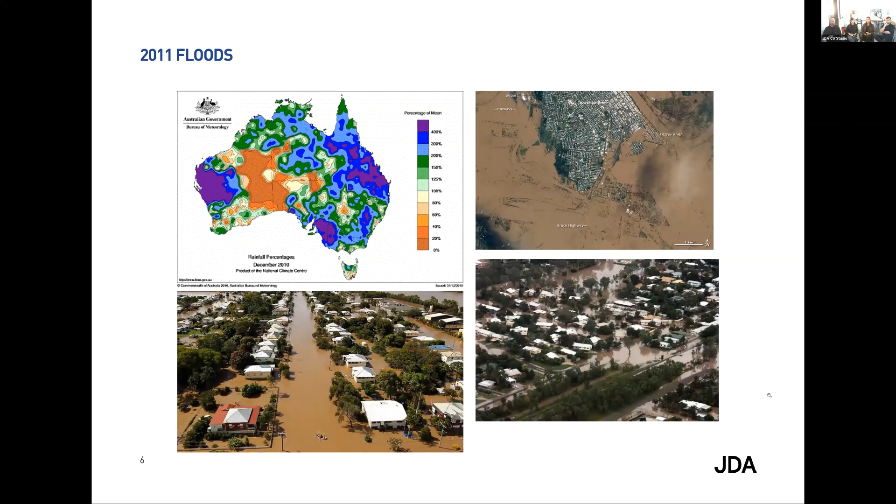So this is my hometown of Rockhampton. One of the interesting things about Rockhampton is, given that it actually floods regularly, everyone there literally grew up in a town where flooding is not seen as a disaster - it's actually well and truly understood. Our houses are all generally raised up above the flood line, even though that line is now moving higher with the effects of climate change. That's generally what happens in a flooding event, so it's not seen as a disaster. Whereas this is Brisbane, where over time population growth and development has meant people are built in underneath and in the floodplain. So it's something that is a problem we work with on a daily basis.

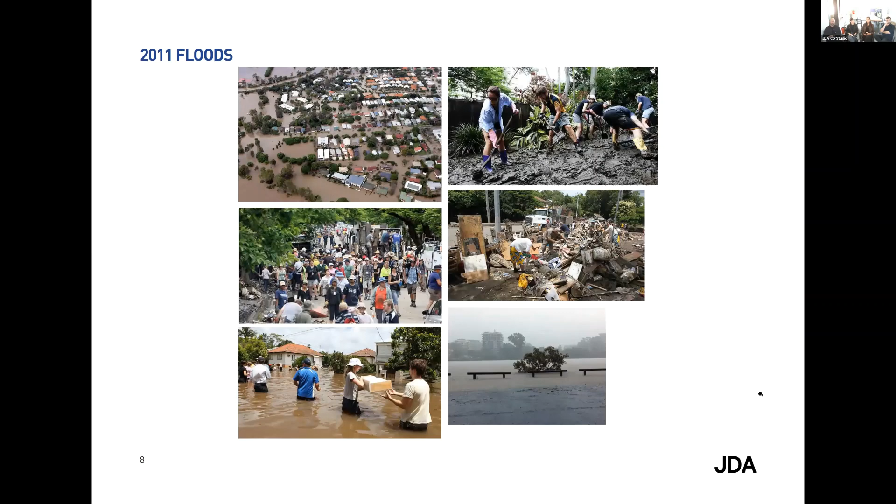This will be in the briefing document we send around. It just gives you an idea - interestingly, we are moving away from the terminology of drought to a terminology of dry. Drought has a connotation of 'woe is me,' like the world is ending, whereas dry is more appropriate terminology for reflecting the fact that Australia's history has been high periods of rainfall, but also high periods of dry. It doesn't mean that it's desert.

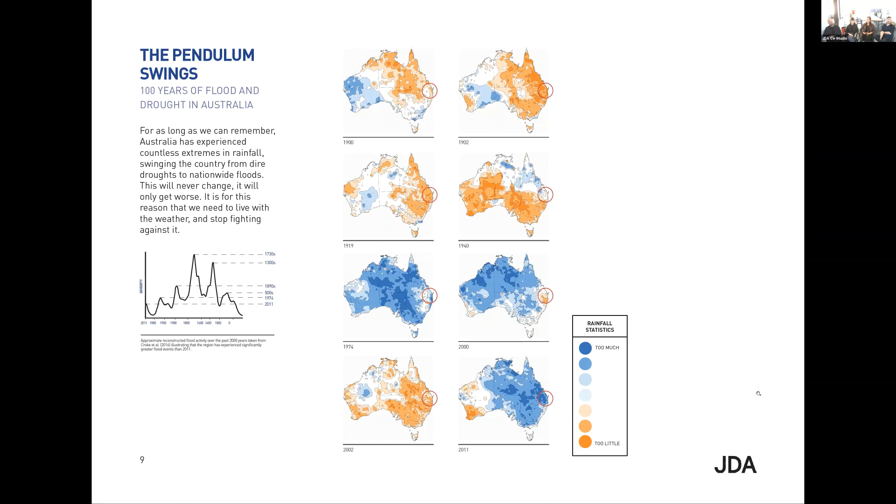This is just how we went through with emergency architects, and that's kind of what it looked like at the time. You can see the student working with a homeowner living in a house that's been flooded, where he's lost pretty much everything.

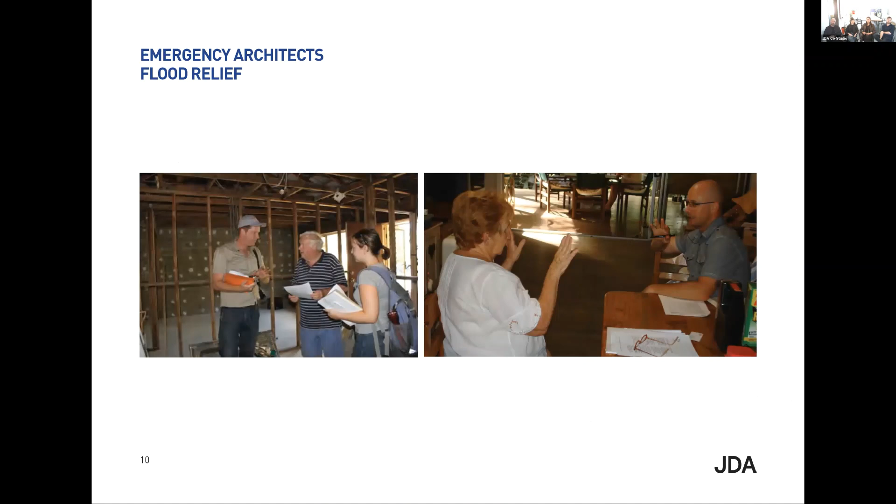This is sort of what we've seen, and one of the houses we ended up fixing up for these clients is what it looked like, and that's essentially how we learned what didn't work.

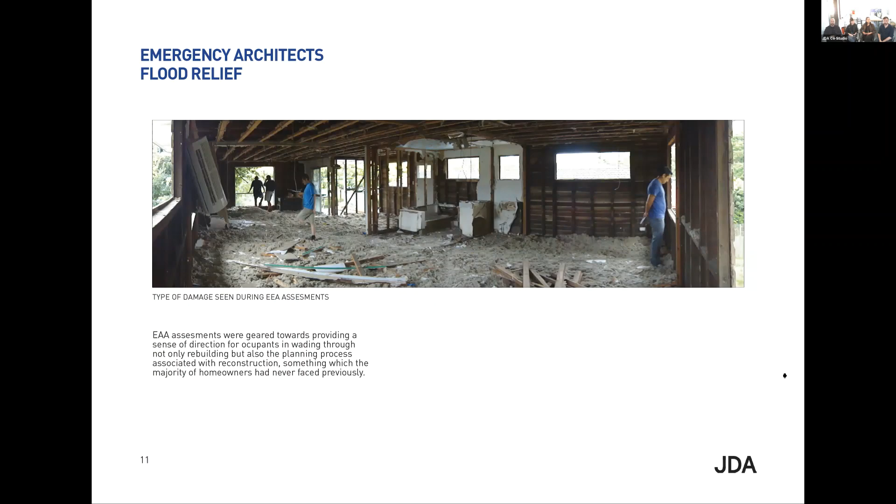Let me check the video. If you go to the next slide, one of the things we did in our advocacy was help people actually treat it as a research exercise. We included a checklist there, but basically went through every part of the building to ask what did and didn't do well with flood.

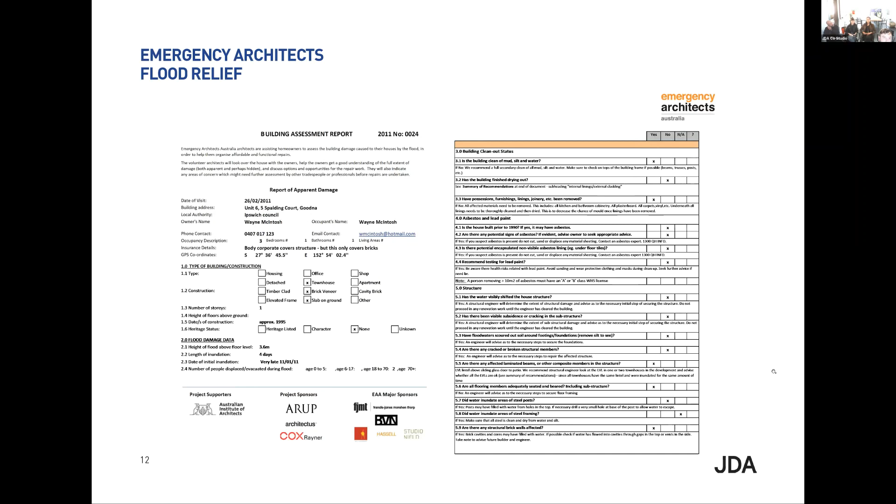Let's just go back to the video and see if it's there now. Yeah, great.

I want us to remember who we are. We are Queenslanders. How's everyone going to survive? Residents right along the coast are being urged to prepare.

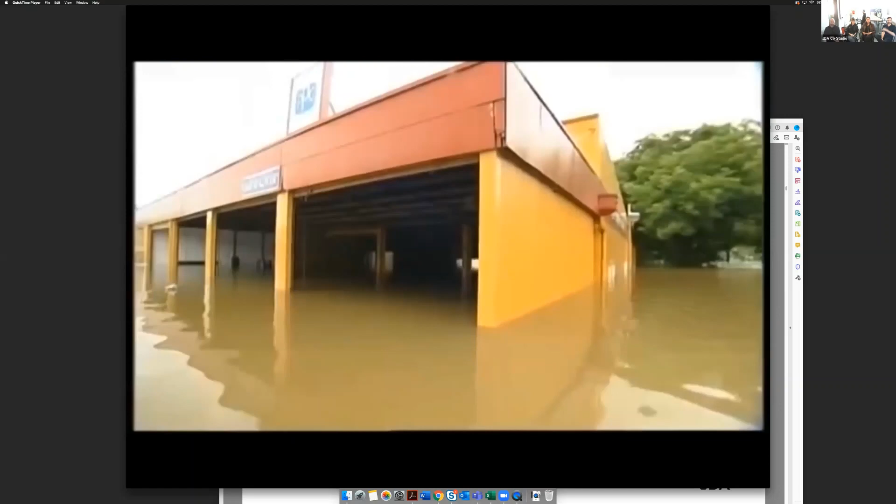Midnight, the start of a new year. Spirits were high in Brisbane - so were floodwaters across a vast area of Queensland. In Emerald, 1,000 homes were underwater. This is an urgent message: Theodore had been emptied, the first time in Queensland history an entire town was evacuated by helicopter. Condamine was the second. Chinchilla had already flooded, so too Dalby and Warwick, and Bundaberg. Residents in the city of Rockhampton were hit. Maryborough was next, then the town of St George, and the main street of Gympie, and Oakey. Chaos stayed. Seventy communities flooded or isolated, some towns repeatedly - this is the fourth one we've had in a matter of 3 weeks. We had a big one, a medium one, then a big one, and then another one's coming again. We have to pack it up, put anything up on higher ground.

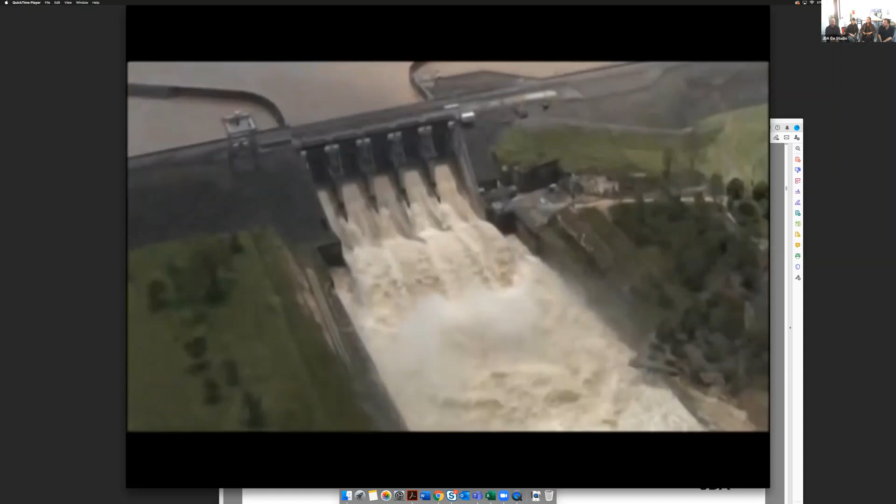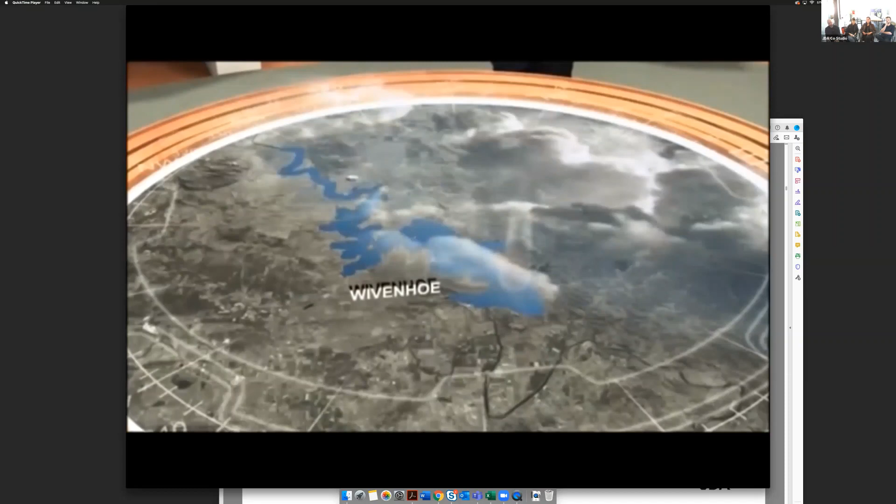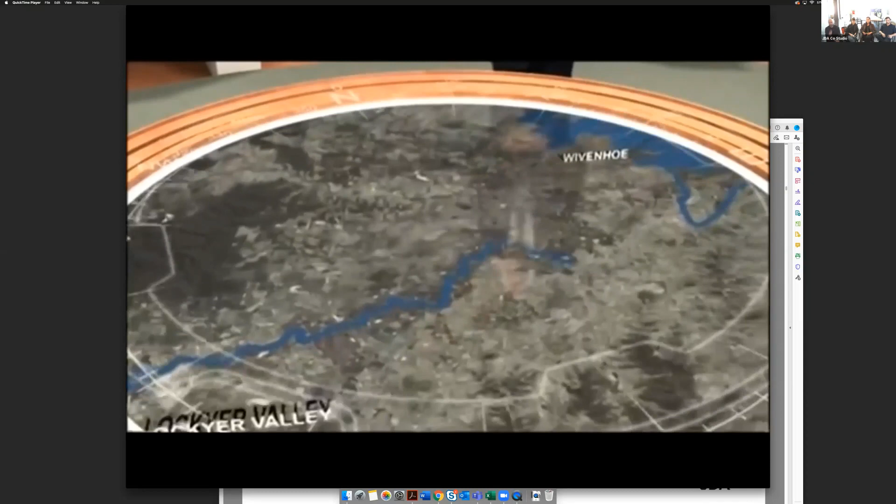And then the deluge began across the southeast, and a brown, murky mass started moving. The dams quickly filled up, but Wivenhoe could take it - at least that's what many assumed. It was a triple whammy of extreme weather events that combined to create the flood of 2011. Problem number one was the huge volume of water flowing into Wivenhoe Dam. Because its flood storage compartment filled rapidly, that water was released and began making its way to the city. Problem number two, the deadly torrent coming down Lockyer Creek, the highest on record, travelled faster than previously seen towards the Brisbane River, where it enters just below Wivenhoe Dam. On top of that, problem number three, another 300 millimetres of rain fell right across the region.

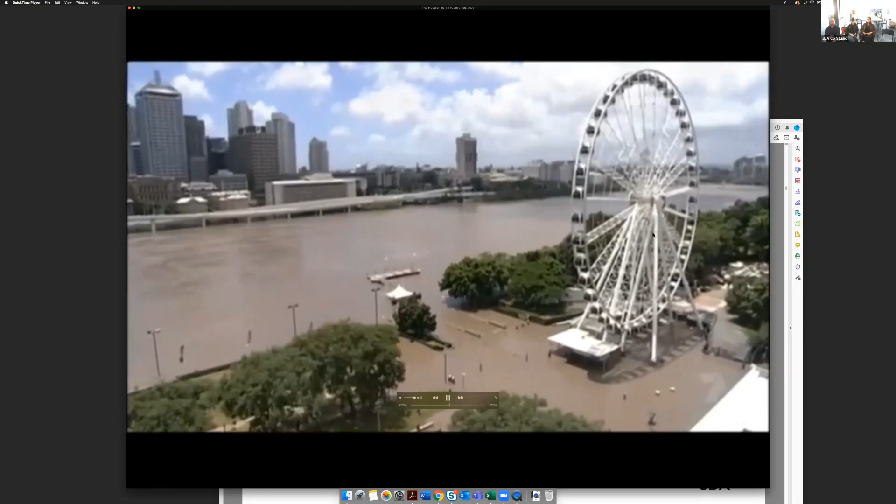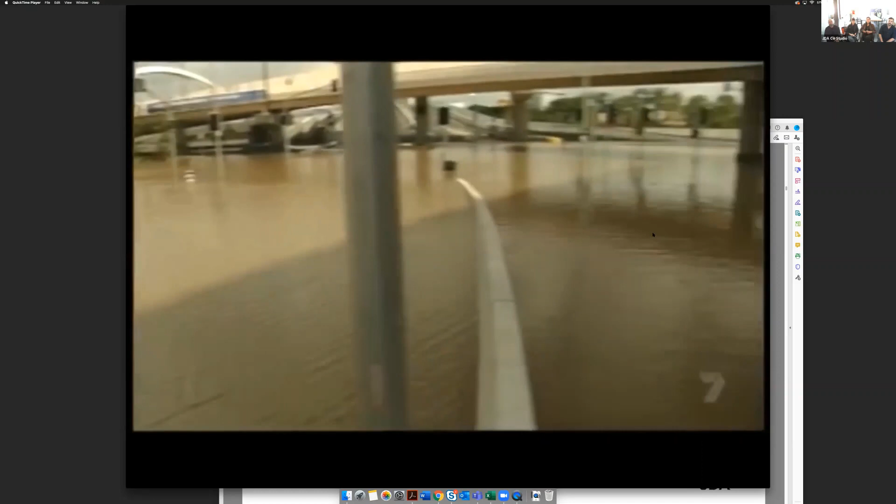Making matters worse, factor in the extra water flowing down the Bremer River and flooding Ipswich. That's why Brisbane's flood was much deeper and happened more suddenly than anybody thought possible. Brisbane, the river city, again a city in the river. Australia's third largest city inundated. This is probably the first time in Australia's history one of our largest cities was actually paralysed completely for nearly a week. 77 Brisbane suburbs were impacted by floodwater, 32,000 homes and businesses affected at the peak. The nightmare of 1974 had returned. Homes vanished underwater - devastating for the people affected, hugely costly. This is probably our most damaging flood, or flood period, since European settlement.

The 1974 flood hit on a long weekend with many more people away. The warnings to residents back then meant nothing to people in the suburbs.

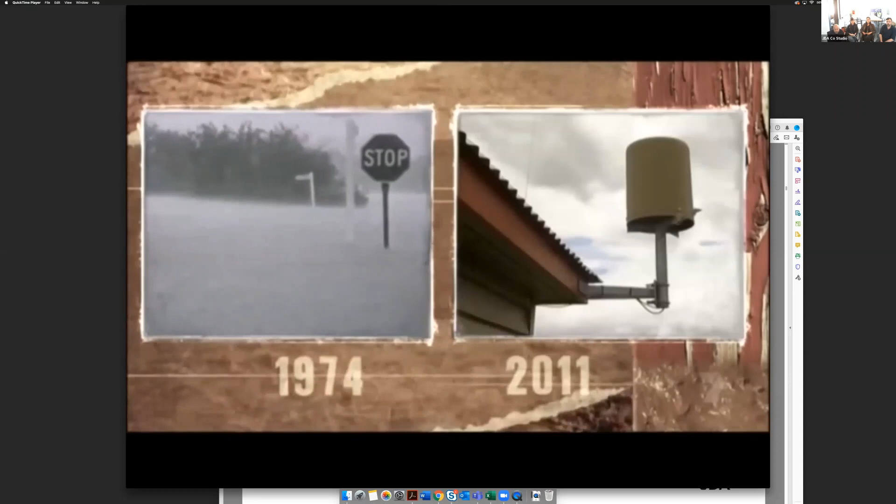This time, council used technology to get information out. In 1974, the Weather Bureau relied on people to phone in readings. Now those readings are automated.

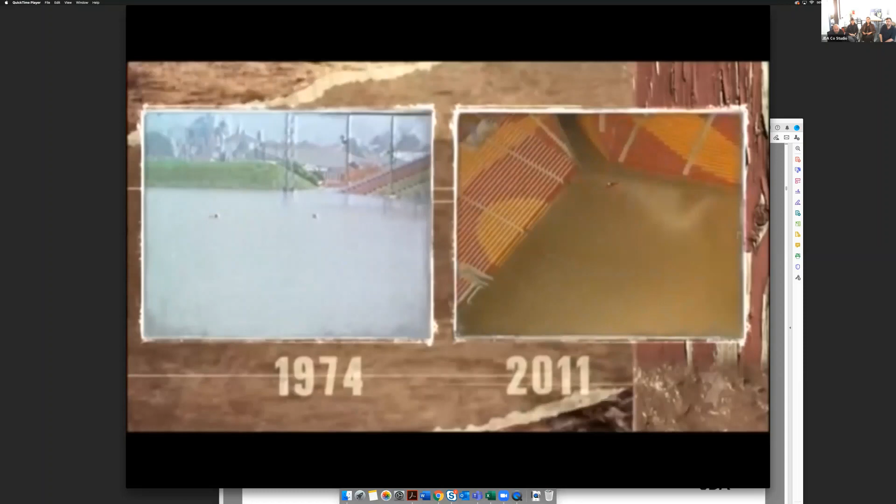But what has changed dramatically is the amount of development on the floodplain. Take Rosalie as an example - this is where we'll be working. In 1974 there was a butcher shop and a strip of businesses. Now the butcher shop is a deli, surrounded by an entire dining precinct.

Across Ipswich and Brisbane, there are more businesses and homes in the flood zone. It's been enormous, it's just unbelievable, the amount of development, with houses still being built, obviously, in floodplain areas.

The stuff that had to be pulled out of the houses and dumped was identical to 1974.

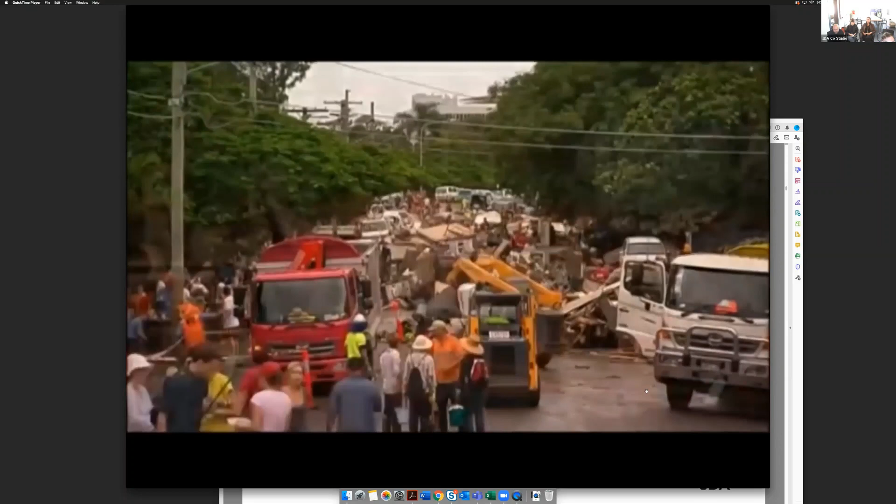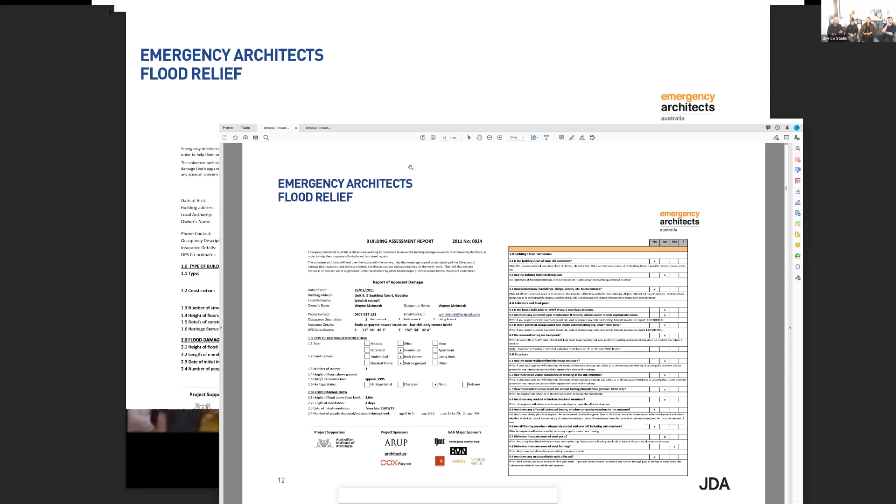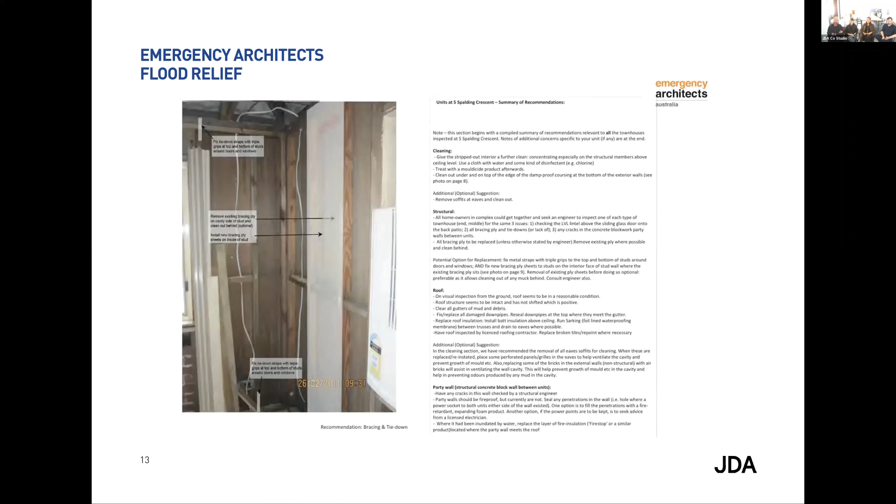Okay, so we'll just go to the next slide. So basically, as we were helping people understand, the idea of the program is to help people understand how to build back better, as I mentioned.

I'll just keep going. One of the things we started to learn about was what didn't work. Traditional Queensland homes worked very, very well, and that's on the left there. They're typically lightweight timber frame construction with no cavity walls, because we tend to swing between very hot periods and not so hot periods.

We won't say cold, because you guys know cold better than we do, versus the more conventional houses of today, which are very much development driven, cheap to build, concrete slab on ground, and then pine frame construction with plasterboard, like Gib board, is that what I call it over there?

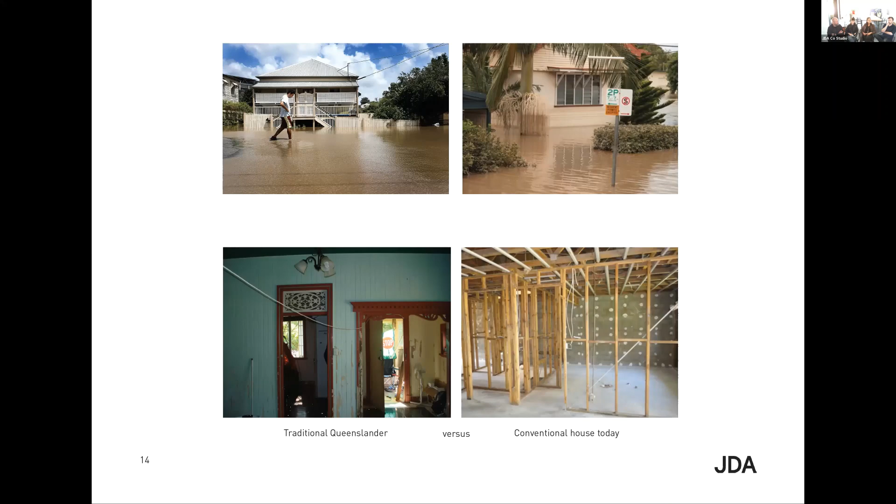Okay, anyway, one of the nice things about our traditional kind of homes, and you'll see a lot of this in Rosalie, which is part of why we've chosen Rosalie, is that it's easy to move these homes. And it happens regularly - we've done it a lot ourselves. You can raise them, you can chop them up. That is the beauty of having a lightweight structure.

Timber is also a very forgiving material. So it means that once you do make a move, you don't have to think too hard about it.

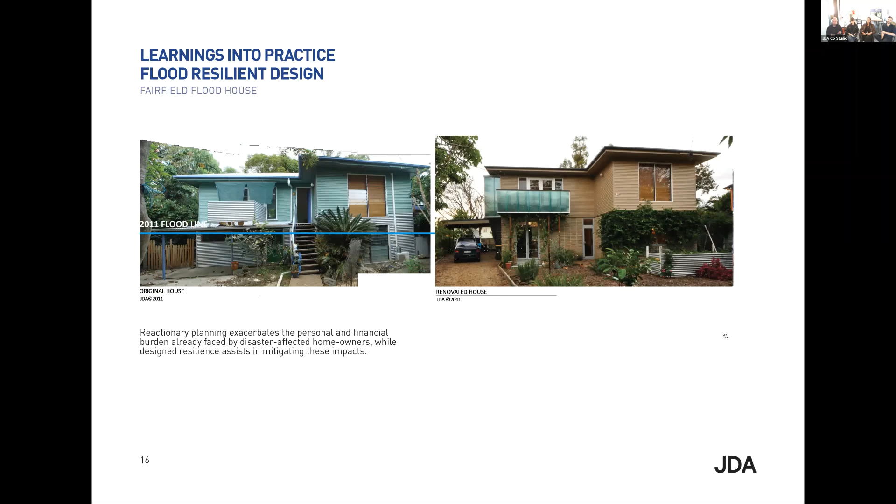So this is a house we did, one of our first private practice projects. You can sort of see where the floodline was, where we started and where we ended up. We'll just quickly flip through this.

Again, we had to shift and raise the home, but the principle behind flood resilient design we started to develop is that the lower ground floor, which is always going to be prone to flooding, is easily washed out. There's essentially two doors in each room for easy cleaning.

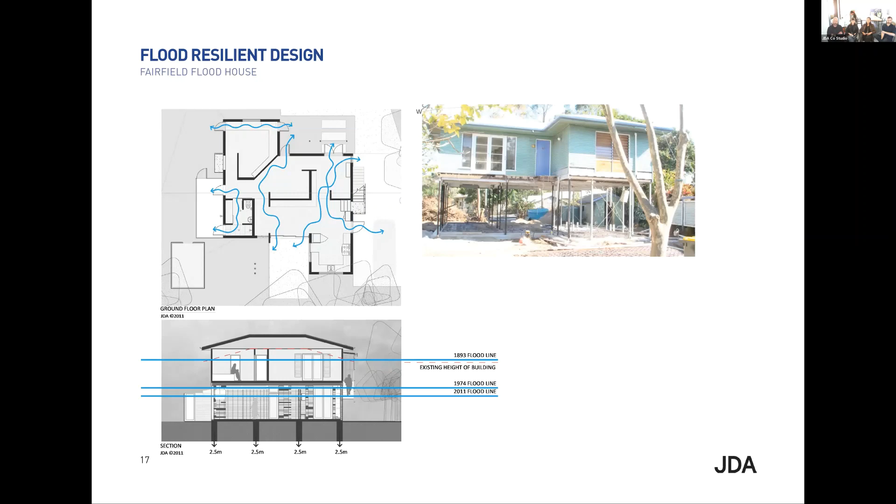Just keep going. And that's essentially what it looks like. So we tried our best not to use cavities in the wall materials and the wall systems.

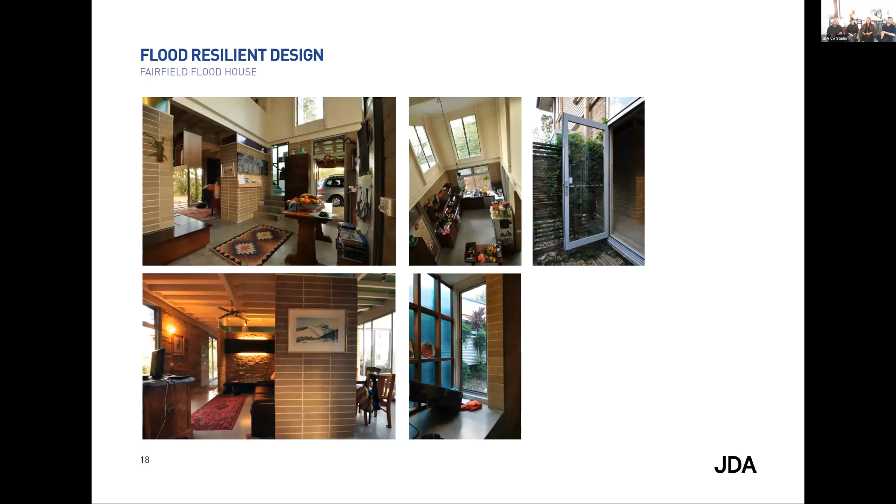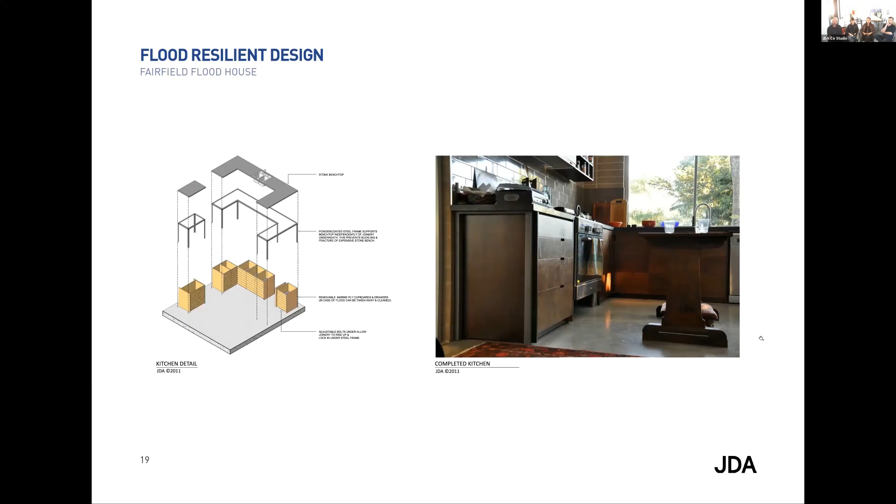All the cabinetry that you can see there, the kitchen especially, and other elements of the house can be pulled out. We had to design our way around how you can remove the carcass, which is essentially holding up the bench top, which is one of the most expensive components of a kitchen, for instance. So we worked very hard with the guys that actually construct these things to work out ways of doing this more appropriately.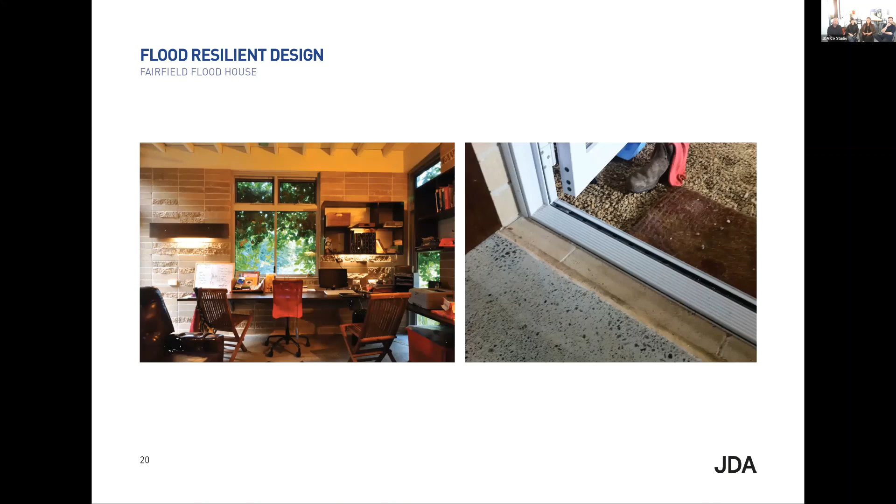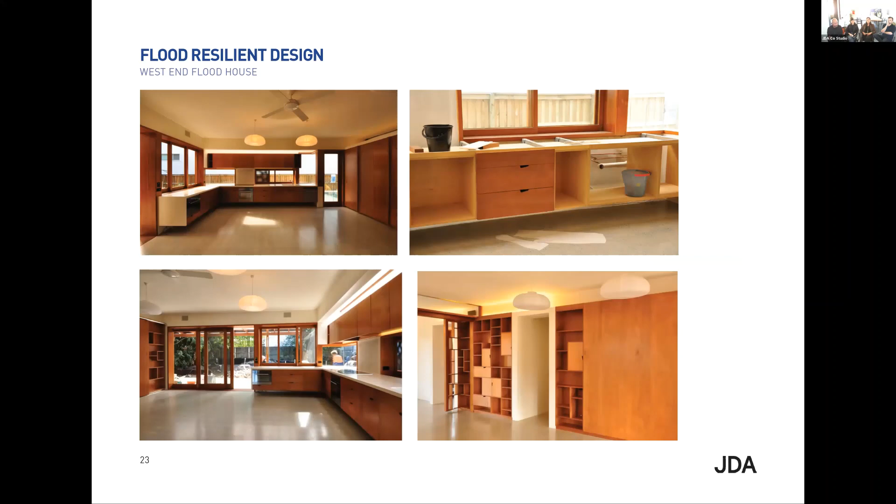Keep going - another house we did. We started to refine our details a little bit more, and worked out things like fencing - how do you actually create a fence that allows water to flow through, while maintaining a certain degree of privacy, for instance.

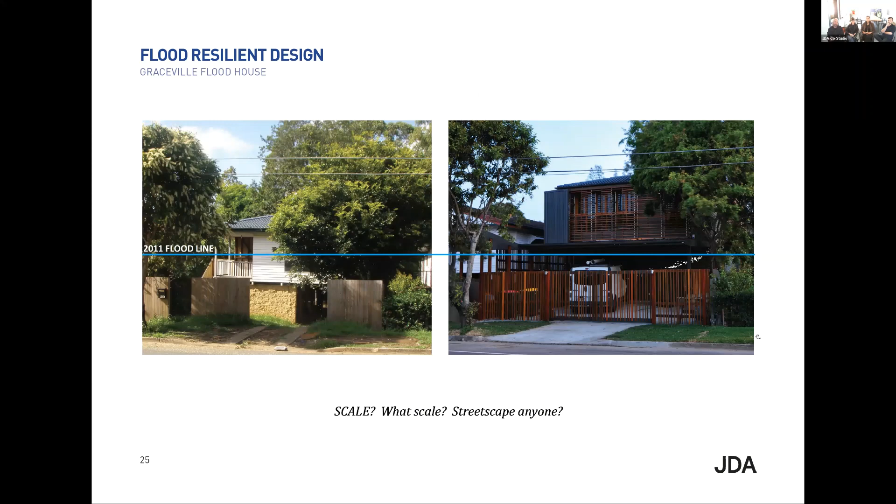This was one of our main - this house here was the first one we started with, but the one that led to a lot of learnings. You can sort of see we ended up having to raise this by a few meters, so 10 feet or so. We went from where you see on the left to where you see on the right.

So that you didn't have a really serious problem. Just go back to the last one.

The problem is we learned a lot about when you start raising homes, not only does the floodline change as time goes on, but the higher you get out of the ground, the more divorced you are from your backyard. That's the detached kind of dwelling, and the relationship to the backyard is something that we in our part of the world hold very dear. A lot of people like their backyards and back decks, and it's a safe place for kids to play. So we ended up trying to raise an area of the backyard up at the same time as raising the house, so that the scale between the house and its backyard didn't change as dramatically as it could have.

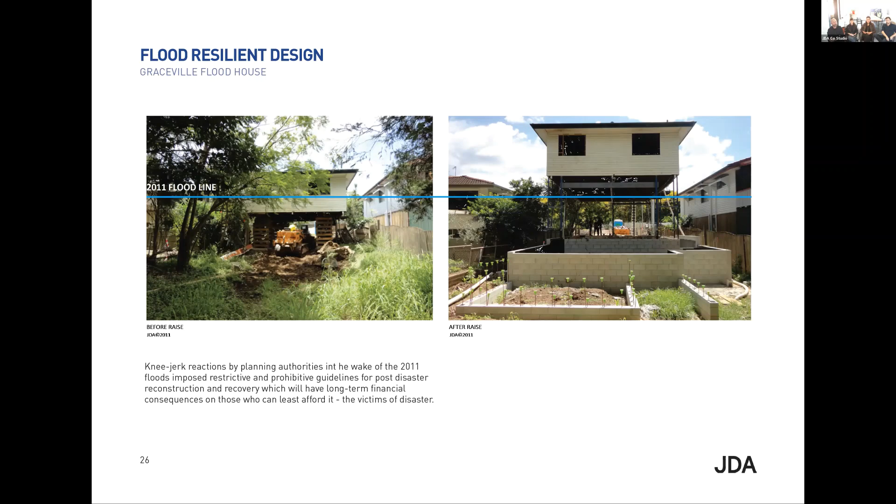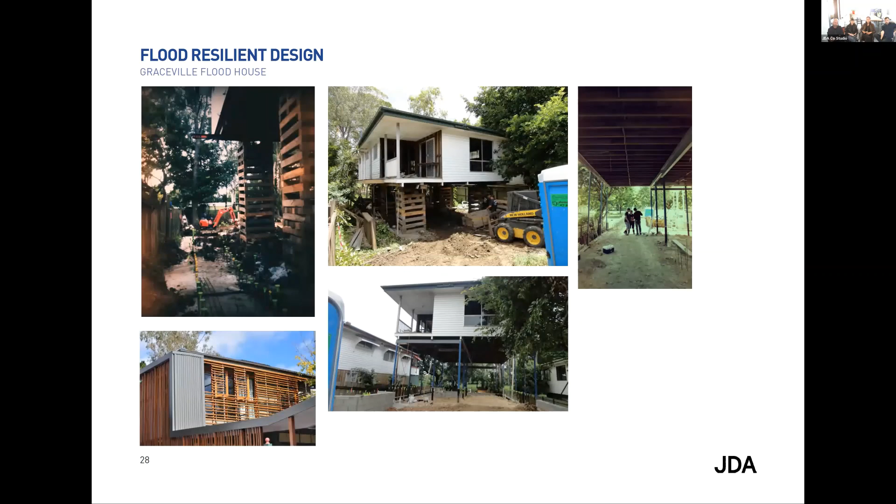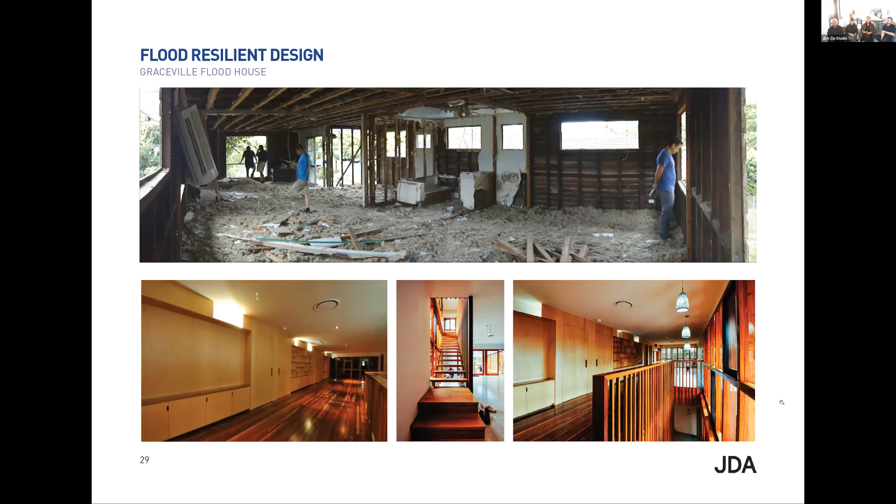So this is the process we went through. We started with what you saw before, and we ended up using materials that could work well in high water and inundation events. Hardwood timbers, marine ply that they use in boats, essentially something that could last 4 to 5 days submerged. Again, the kitchen in that previous image is designed to pull out and put upstairs prior to an event.

One of the things we noticed, and this is where we started understanding, as architects we generally are tasked with solving problems that occur because there have been bad ideas followed through in terms of land use planning. One of the things we're thinking about with the Rosalie project is, if we had an opportunity to do it better, how would we do it better? And that's where you guys come in.

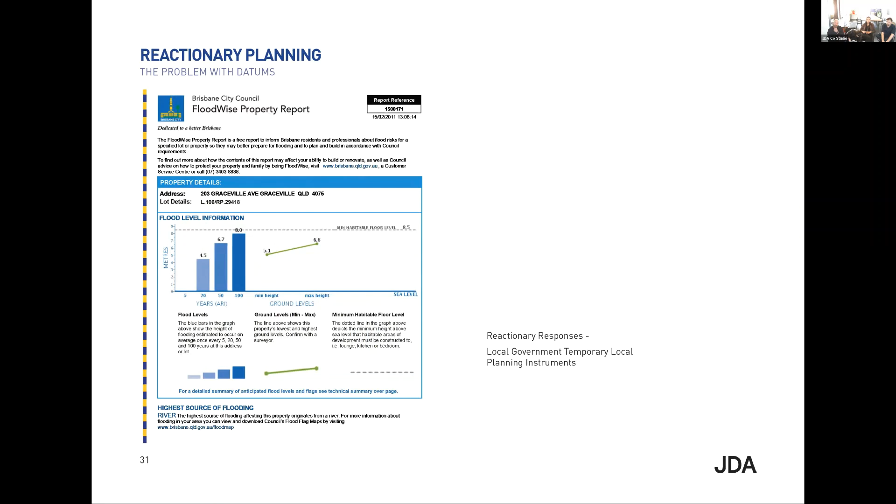But this is where it all began. Basically, each property in Brisbane gets what they call a floodwise property report, and it gives you meters AHD, Australian height datum, which is roughly around high tide level. So if high tide level is between 0 and 3 feet in some areas, you basically multiply by 3 for all those numbers. So a minimum habitable floor level of 8.5 meters is about 25 or 26 feet for this property. But you can see the ground levels on the side are significantly lower.

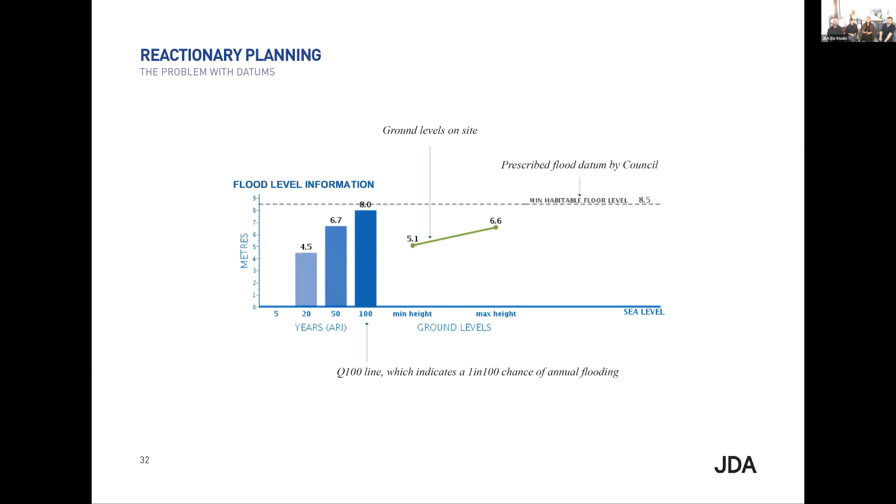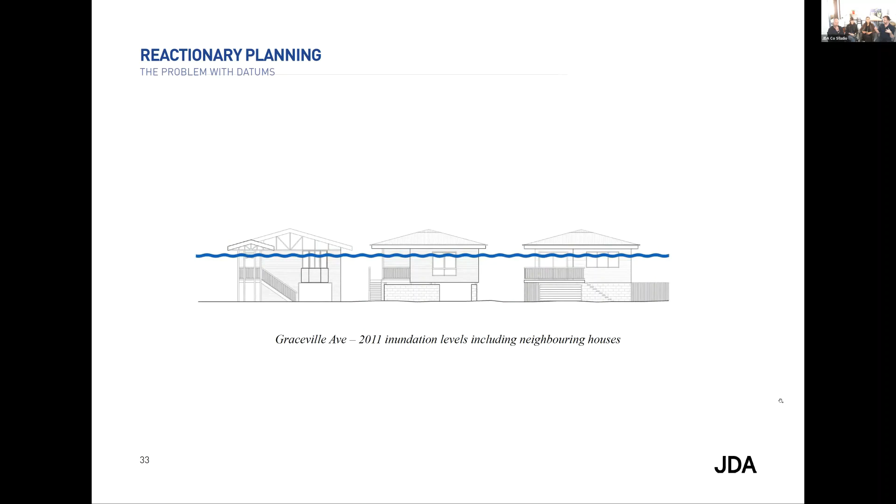Just keep going, Britt. One of the things we were looking at, I was writing this, we did this in 2014 or 15, and I was writing my thesis on this house. Then we went back and looked at the building approval we did in 2011. When James is talking about those datums, one thing to keep in mind is that they're wrong. You can never quite trust them, and we'll show you why. When we flooded, that's what the house was, and that was the datum that the government set.

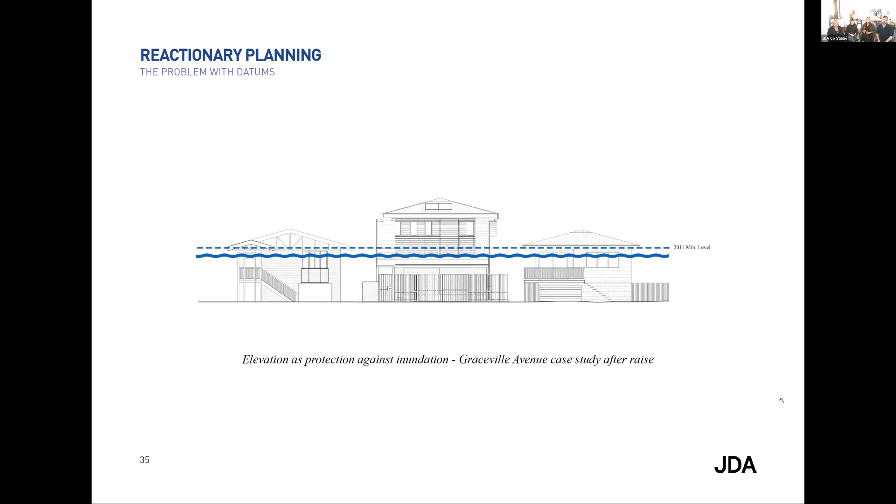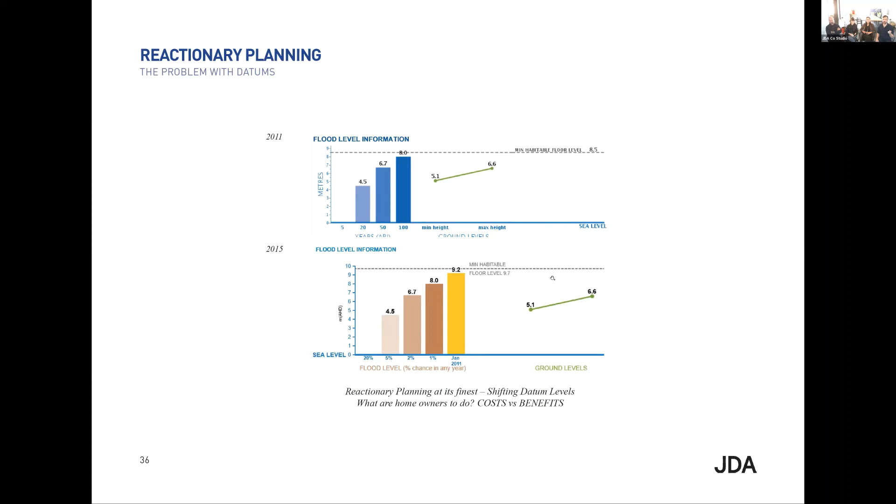Then we renovated the house to have the upper floor actually be what we thought was safe and comply with the codes, and made the lower floor work with flood. When we went back, the government had revised the datum up 1.2 meters, that's 4 feet. So then the upper level of the house was also effectively uninhabitable per the government standards to code.

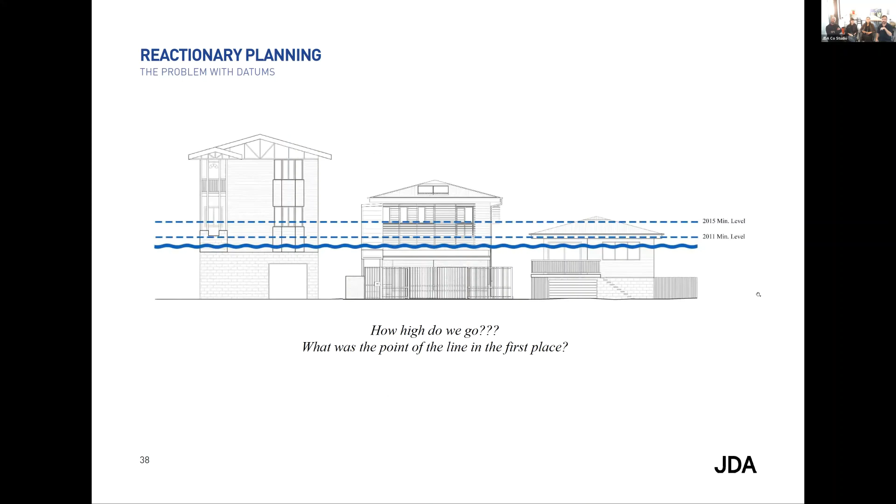Then the neighbor built the house next door to actually comply with that, and that's what it was looking like at the time. It's insane to just take these datums as a given. We as architects have to think about how we can work with these lines better, but also have some influence on how we have a conversation with the government about how this actually impacts our cities.

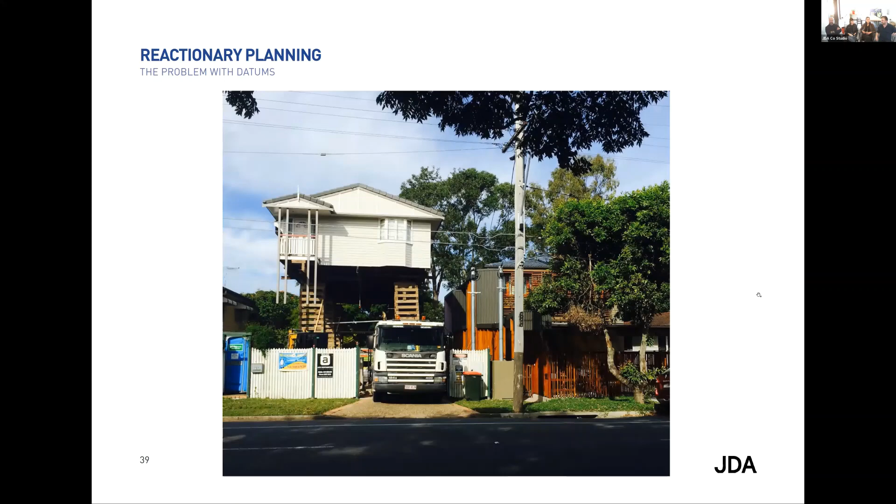One thing very different between here and the US is you guys believe a lot in levees, and you've got your Army Corps of Engineers that manage a lot of that. The thinking in Australia is they're expensive to do and don't necessarily work, and a lot of the time, from our experience in many areas, once water gets in behind a levee, you struggle to get it out.

So there's a lot of discussion, and a lot of communities around Australia have had bad experiences with levees. The broader thinking now is, what are the other ways we could actually protect our cities? Flood resilience is one of those. We're currently working in Melbourne, we've done the flood resilience guide there, and the Gold Coast, near Brisbane, which is a tourist mecca.

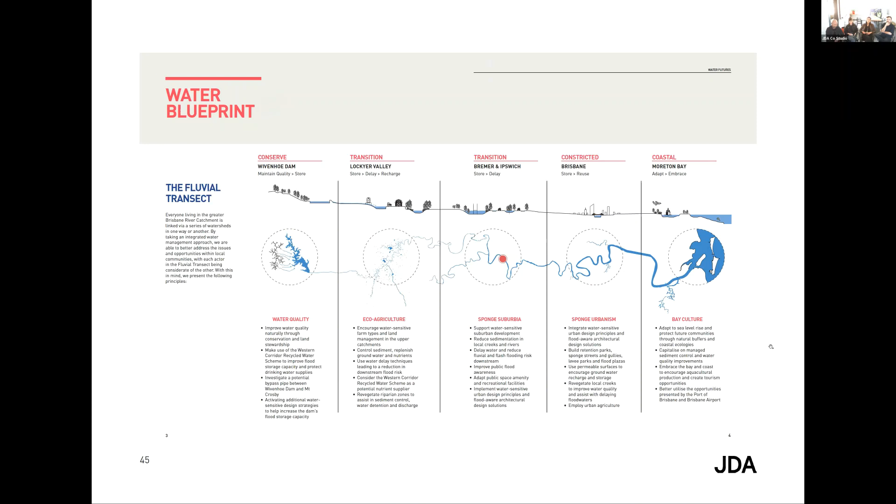As you've probably seen in the early work, if you've read the stuff about Rosalie already, we're taking this kind of approach and doing it at a much smaller scale for a smaller watershed in Rosalie. I'll just keep going through. We've got 10 more minutes.

That then led to doing the flood resilience guide for Queensland, that's our state. I think Queensland, in terms of size, what would it be for the US? Queensland's Texas — something like the size of Texas. That's been a very valuable document that's now having an impact on a broad range of policy decisions.

It's a guide, mainly it's not policy yet, but that's the intention. There's a bit of a process to go through from being a guide into policy, but it has a policy impact already. As I mentioned, Gold Coast Flood Resilience Guide and Melbourne, and then more recently...

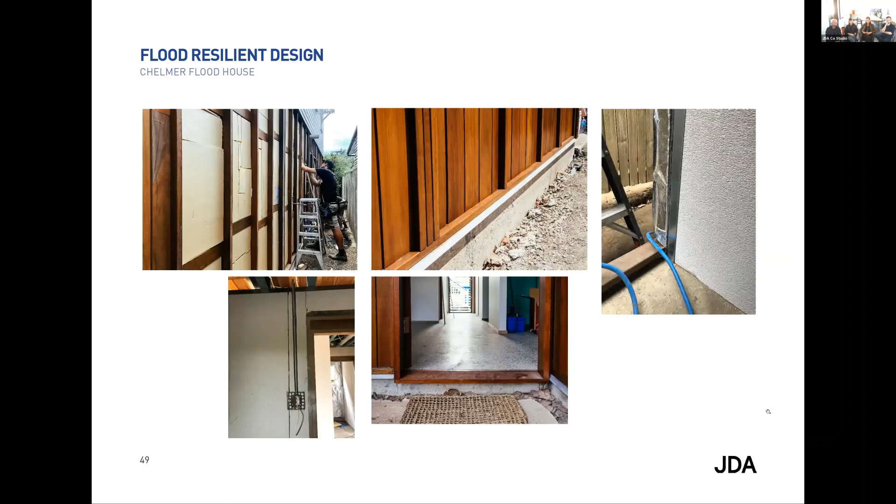We use a geopolymer concrete slab because we're committed to sustainability, in the sense that if we could find ways of doing things affordably, then we should. A geopolymer concrete slab uses waste from the mining industry, and it actually absorbs CO2 as it ages. That's something we're very proud of.

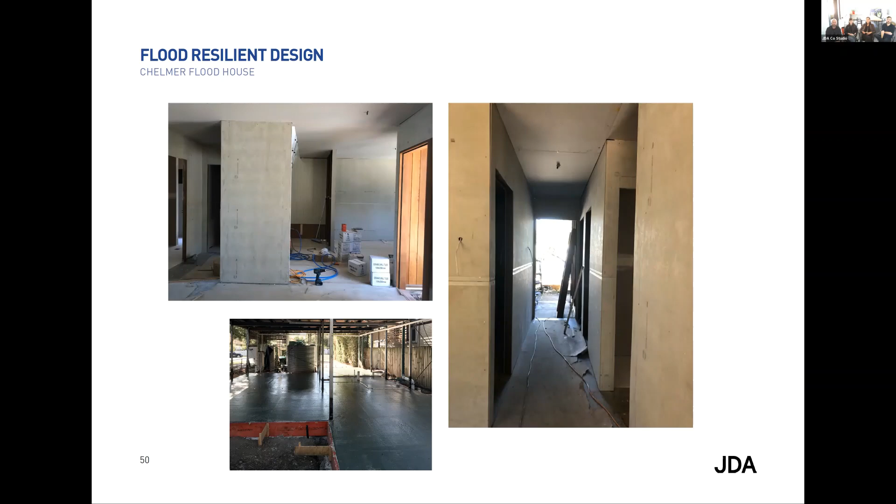This is the first house in Australia that used a polished geopolymer slab. The idea of polishing sent the chemists at this concrete company scuttling around worrying about cracking, but it didn't in the end. So this is kind of what it looks like at the end of the day.

One of the most important things about advocation is basing it on facts. You can't just say as an architect, 'I feel like this is a good idea' without having some basis in why. So we often bring economists into our projects. This was the one we did for the flood guide, but it gives us a basis in creating the cost-benefit associated with an idea, which is something I learned from the Dutch as well.

This is one of the main ways we've been able to advocate for good ideas - using science to our advantage. Anybody thinking about doing a large-scale infrastructure project in Australia needs to have a cost-benefit ratio of about 1.5. That means for every dollar spent, there's a $1.5 return.

The project that we're going to show you now has an actual cost-benefit, now that we're building, of 8.9. So for every dollar spent, it's $8.90 return, which blows everything out of the water - which means the local council has just given us an extra 2-year extension on the program.

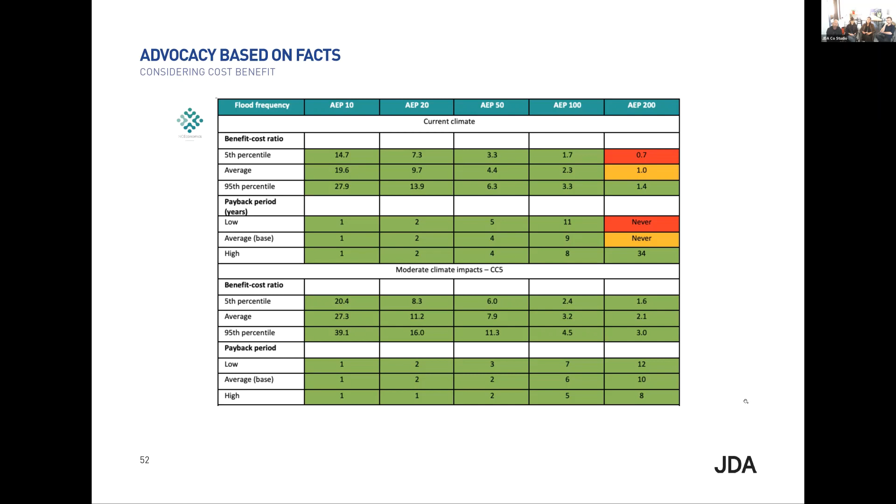So how do you advocate for change? It's about building a case, considering economics, and knowing who are the key parties you need to influence to make change happen. A few of the parties we've addressed in some of those documents are local government, state government, insurance companies, statutory authorities. We've spoken to catchment associations, done a lot of work in public engagement, and also educated and worked with builders and suppliers of products - like in the Chelmer House - and the general community as well.

One very important component to climate change adaptation in our country - because like you, we have a federal government that makes things very difficult to make change - is that the insurers are essentially the biggest influencers in this area. So we worked hard at cozying up to them and explaining why it was important to consider. That's where the cost-benefit work came in. Surprisingly, they jumped on board very quickly.

So our houses have received - the houses that we do, our clients get a 50% reduction on their insurance premiums, which is very substantial and helps a lot. Unlike the US, our insurance is not linked into a nationalised system. Our flood insurance is not tied to our mortgages and things like that, so it's a lot easier for people to get flood insurance.

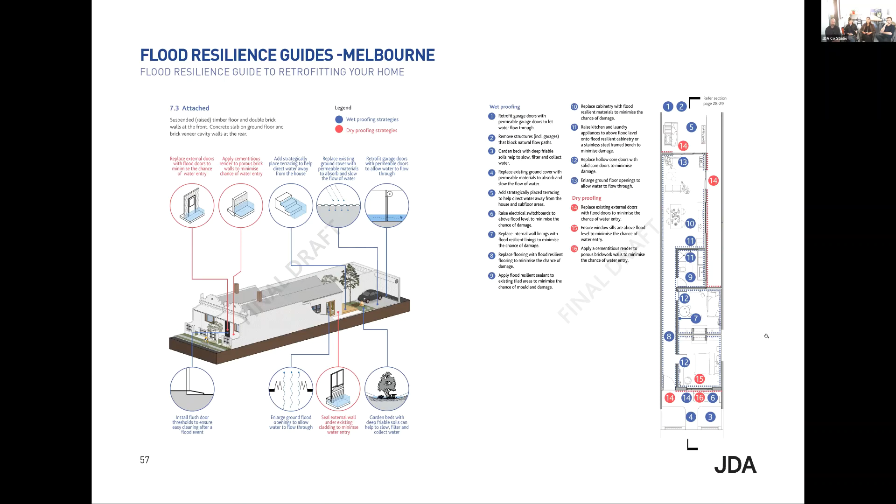This is just going back to the Melbourne Flood Resilience Guide. This was an interesting exercise for us to take our learnings from our local state of Queensland and translate them into a different climate and different context down in Victoria and Melbourne. So this is just looking at denser, older terrace house dwellings and how we let the water flow through in a very densely populated city.

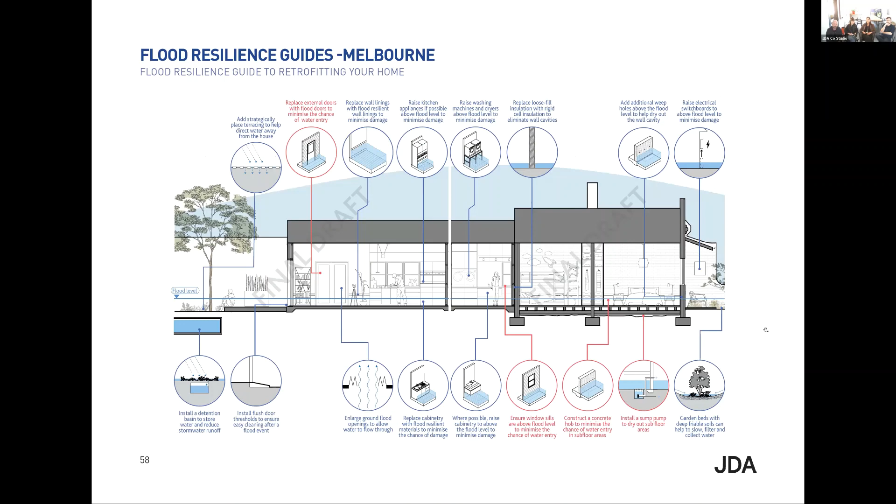One of the interesting things about Melbourne is, compared to Brisbane, the topography in Brisbane is very hilly with a lot of valleys and a lot of flash flooding, whereas in Melbourne it's incredibly flat - not too dissimilar, I suppose, to New Orleans perhaps.

I don't know St. Louis, so the principles are the same, but we've had to learn a different typology of housing and how to adapt our principles to that.

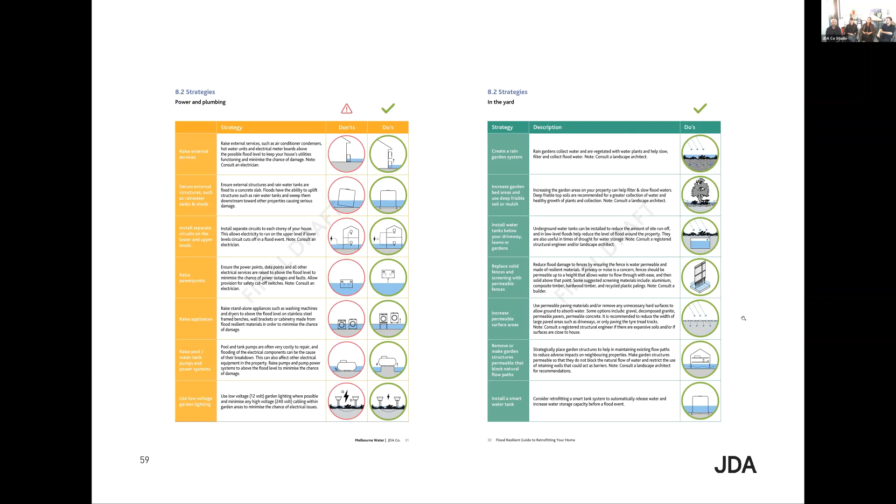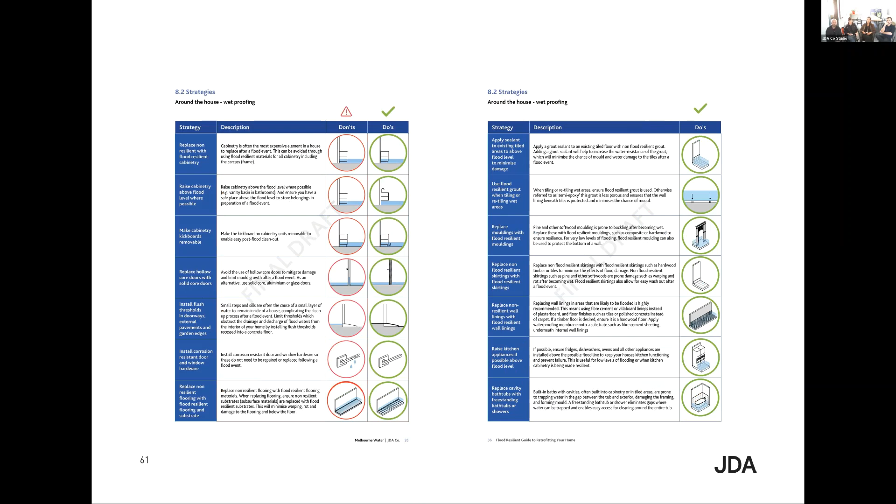This is a resource for you guys as well, looking at how we wet-proof and dry-proof structures, considering electrical services and how you use your garden as a way of mitigating the effects of flood events. And this is a table of non-resilient and flood-resilient materials.

And we've just had that extended by another 2 years, so that's a good thing. Just keep going, basically.

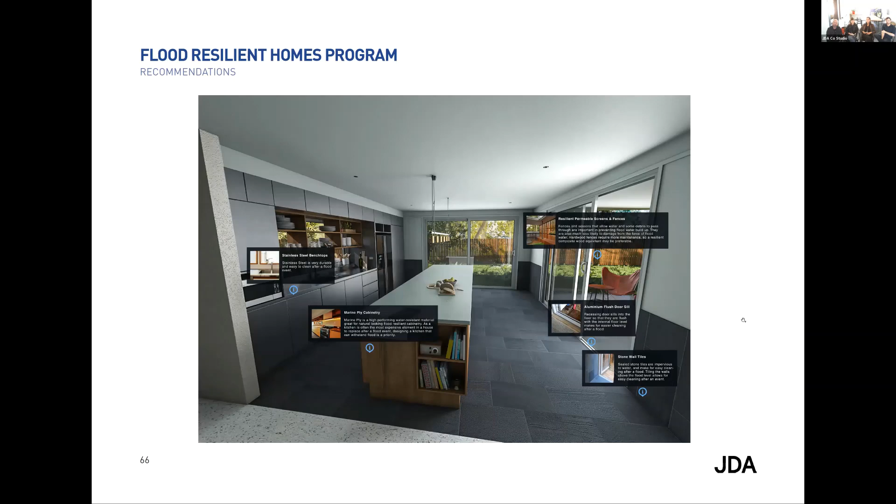Just keep looking through - these are some of the ways we designed this thing called a flood hub. The previous image you saw was a virtual flood hub, essentially, which explains to people in certain communities what the ideas of flood resilient design are. So this is another one of those community awareness raising advocacy activities we get involved with.

When I say we get involved with, we gave the council the idea for this. So we're not passive participants in anything, we're very active. I've found that a lot of local government authorities, as long as you can inspire them with good ideas and they believe you, then you can pretty much get away with a lot of things.

And that is, you know, why don't we create something like a little tiny home that actually talks about flood resilient design. And then this thing gets towed around on the back of a truck, essentially, to a whole range of different areas in Brisbane.

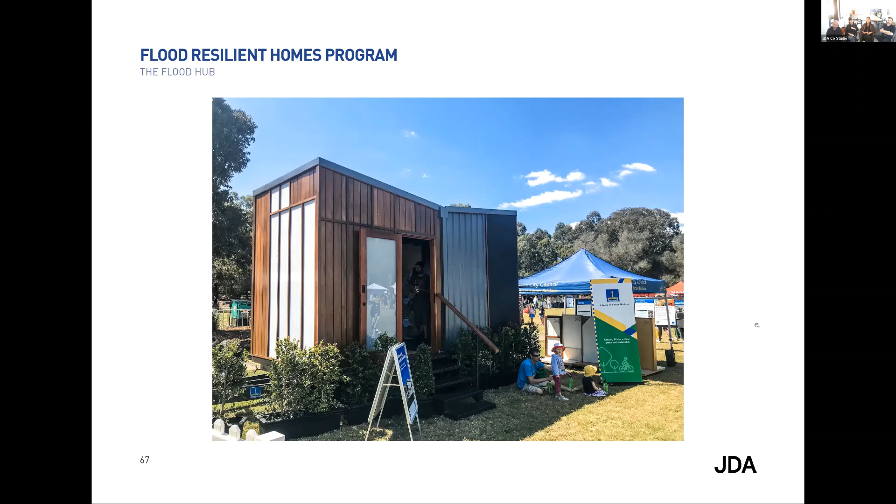This is Rosalie. The reason we chose Rosalie was because of this program. The Rosalie Futures is a recognition that it's an area of inner city Brisbane under quite a lot of population pressure, and over the next 50 odd years it will be an area that comes under increased scrutiny.

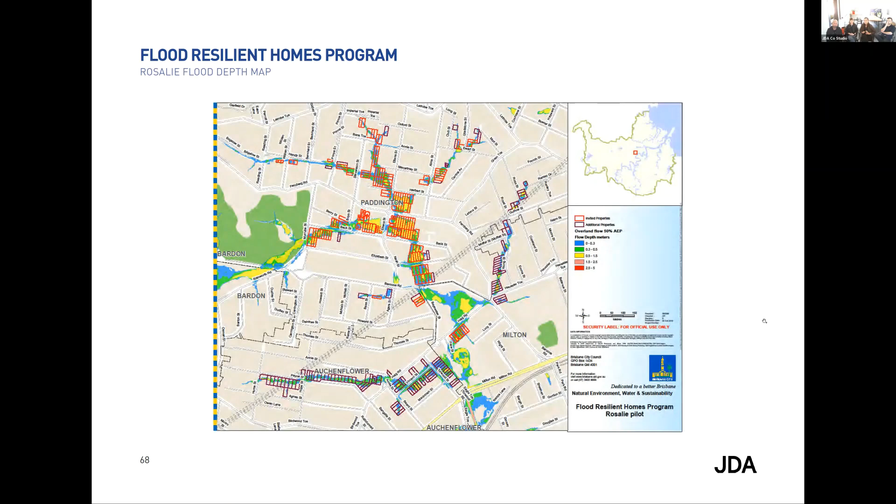But it's also highly flood-prone land, and not just riverine flooding, but also flash flooding from high rainfall events. On this map, the properties shown in red are flood-affected houses - the council gave us that. This is one of the maps Leonore's been working on, which shows those properties and the flood-prone area we've chosen for Rosalie Futures.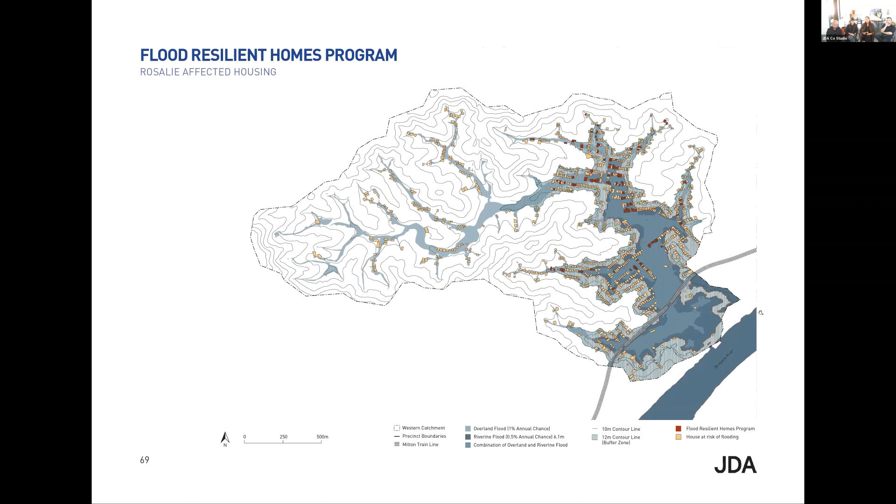This is a resident's report that we essentially give to the homeowner. One of the critical components of this is awareness raising, and that's been quite valuable from a council point of view, because a lot of the time they're dealing with quite angry people when somebody's bought into a property and all of a sudden they're getting a metre of water, 3 feet of water through their ground level.

And the way we produce this is we actually go in and talk to the homeowner. We laser scan their property and talk to them about different flood resilience strategies that could help reduce their anxiety if there was to be another flood event in the future.

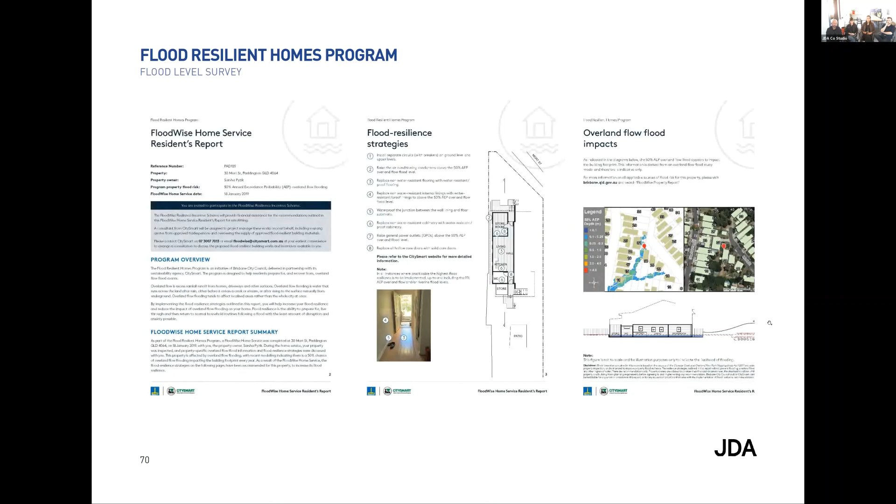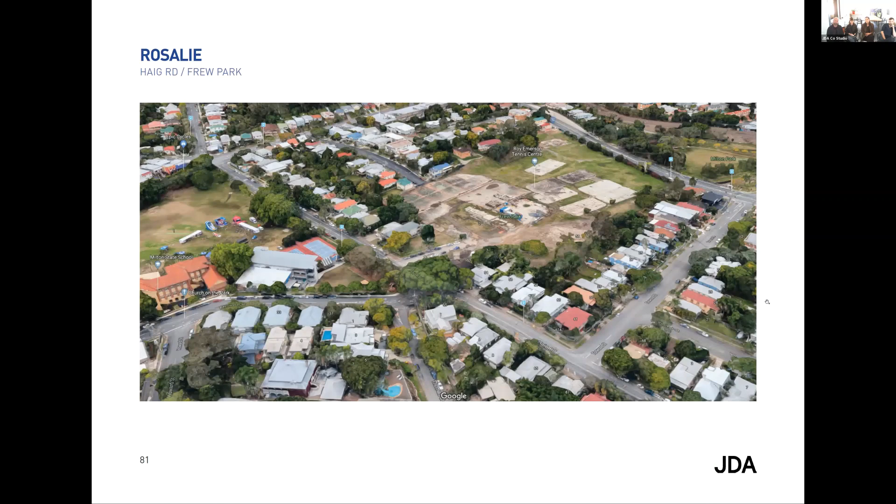Different angle of the same state school, which is here. Gregory Park used to actually be called a swamp and was the end of that river we were speaking about.

Okay, and here we have the catchment itself. So the outer edge shape that you see is delineated by the highest point of the whole catchment, essentially following a ridge line. The topography can be described as a series of rings that goes lower and lower as you reach the overland flow, which is the very branchy looking creeks joining down the middle.

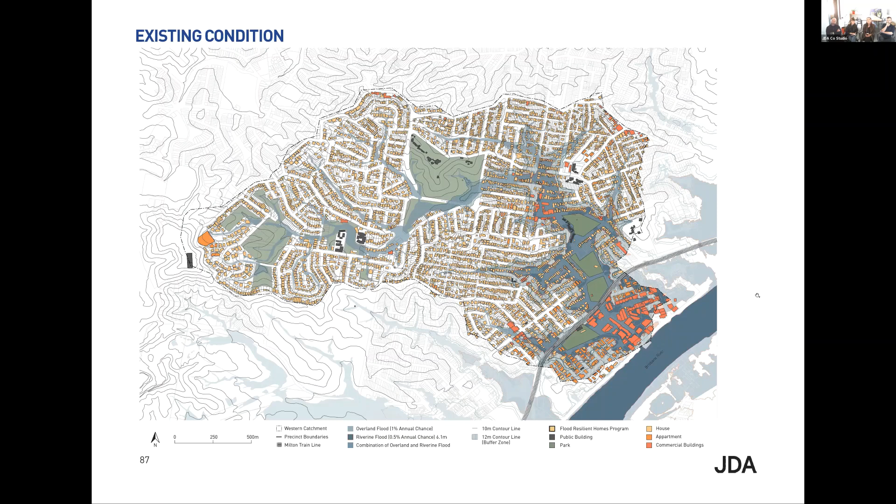At the end of last year, we used Rosalie again because we know a lot about it for a small day-long charrette. We started to do a similar exercise to water features, where we wanted to understand how the system of pluvial, or overland, water flooding works within this catchment.

This was a rough map that I drew describing slowing the flow in sort of the top of the catchment in the higher ground, blue-green streets, using your small residential streets to absorb water, and then in the lower areas that we were describing for adapting the neighbourhood and potential future uses, which we'll talk more about later.

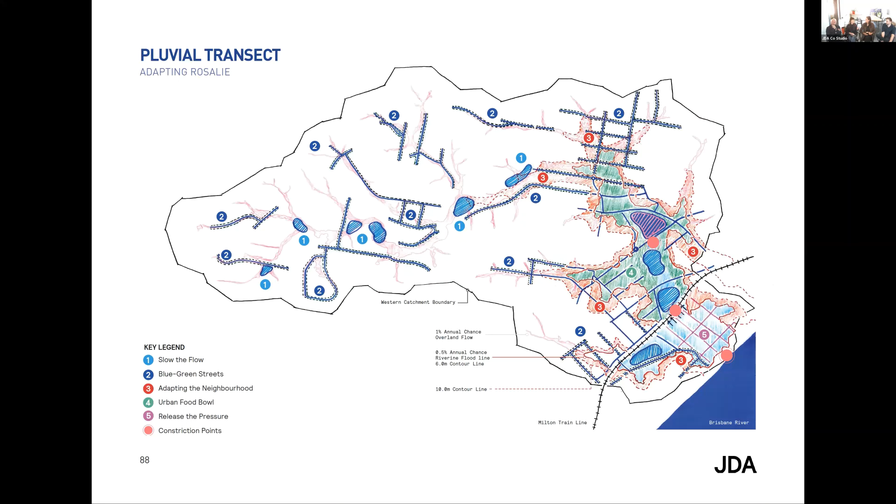This is what sort of informed the framework that Leonore will talk about. So keeping that map in mind, now we start to translate it into a Transect methodology, which is essentially linear systems that relate to each other. So you can't break down an individual site without looking at the catchment as a whole and how it functions, and how all stages of it affect each other.

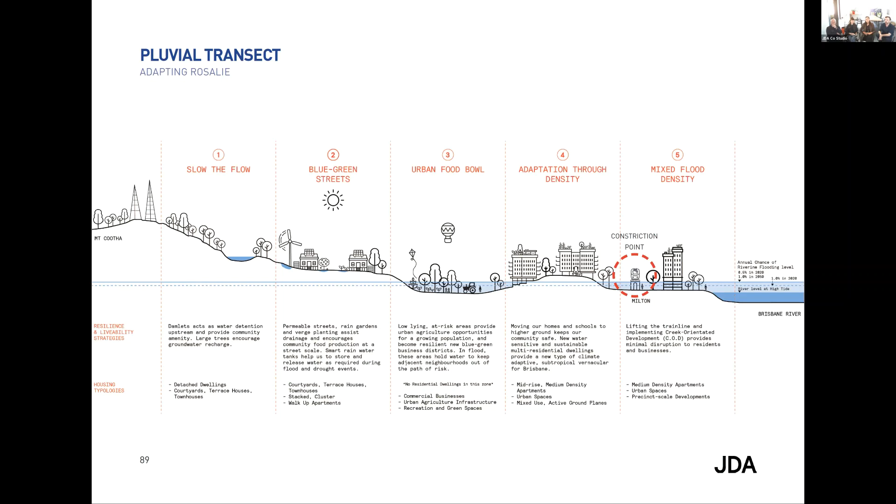This one specifically dealt with the idea of growth. Rosalie has a population projected to double by 2050 in that catchment. So it put the constraint on about where would people live and how you produce density in a way that's safe, but also brings amenity to the lower lying areas. You'll see in each of those 5 sections, there's an idea about slowing the flow upstream for overland flow, working with the existing residential fabric, the traditional character Queenslanders, and then moving down to developing more urban ideas.

It's the same logic, and you guys can read more into these, but we see what's happening in Rosalie as a direct example. It's yet another component of sponge urbanism. So basically, what do you do in an area of high population growth when you have climate change impacts, and now we've got COVID impacts?

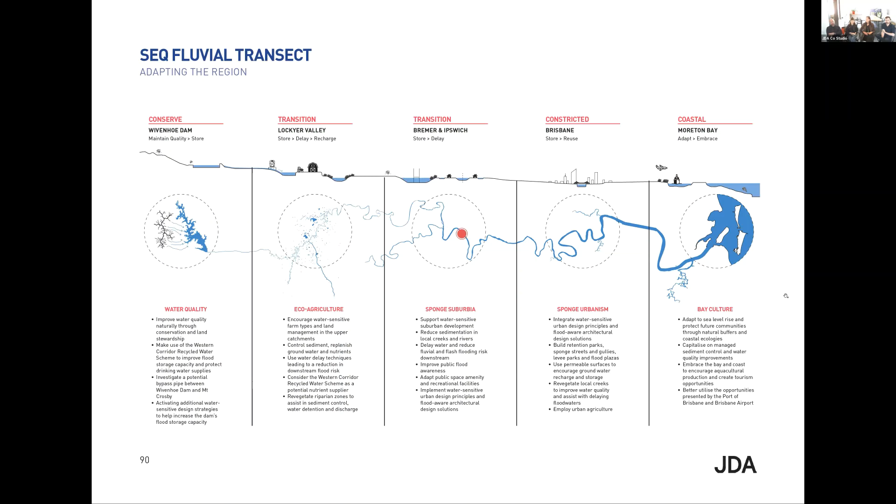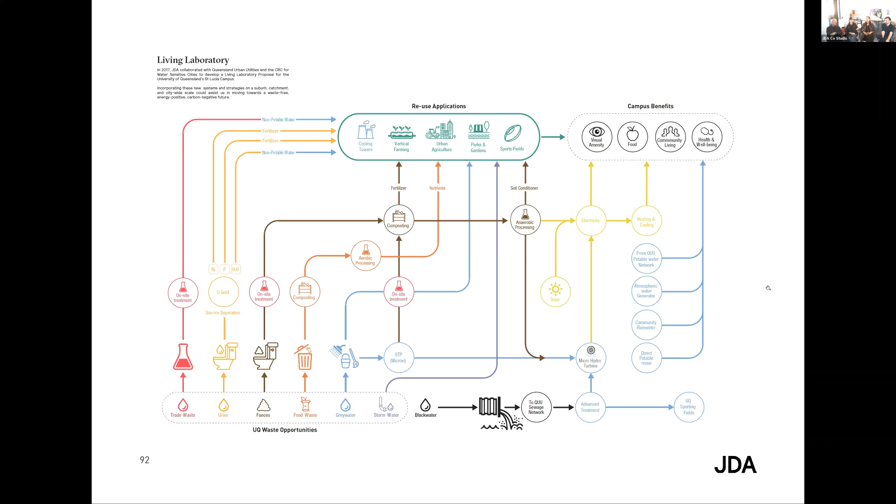If you had a look at the task sheet, you would have already started to see one of the first tasks. What we're asking you to do is look at flooding within this area, which we've already talked about a lot, and then densification in Rosalie, and then look at a system or a condition you're interested in or have been exploring over the past few weeks. Combine them together and examine how these three systems or conditions exist on your site, then map their relationship in a transect diagram, similar to the one we showed you before in Rosalie, and consider how these systems could inform a built response on the site.

What we're hoping is we can piggyback on the work you've already done this semester. We'll provide you with all the understanding of flooding in the area, so you don't have to go off and do a whole bunch of research. Hopefully our expectation is this will be quite an enjoyable process, and not an onerous one. The minute you feel that it is, just get in touch with us and we'll make sure we're available, one or two of us, the whole week. I'll be flying in and out, coming in and out, and we've got various meetings, but generally there will be somebody available to talk.

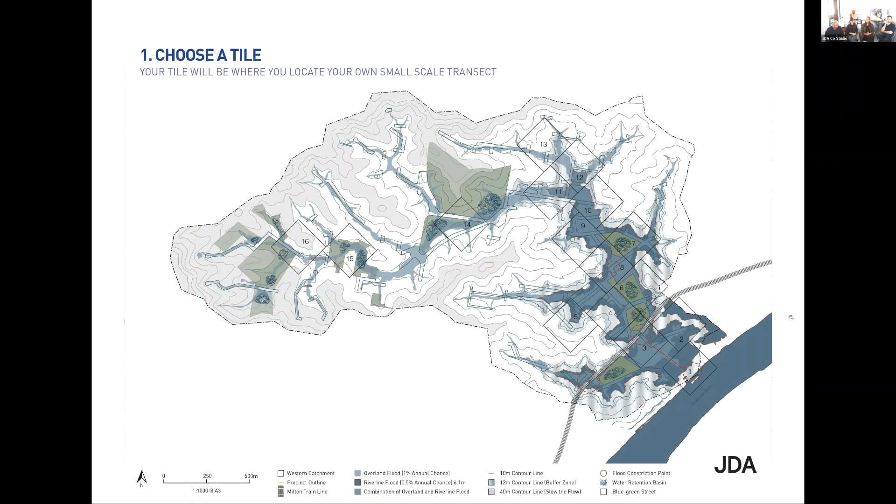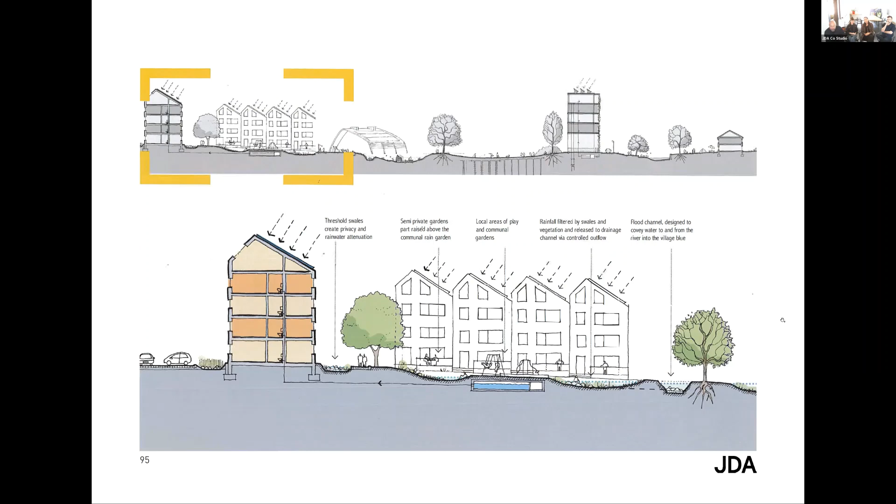This precedes the example of the scale of transect that we'll be looking at, but it's just giving the concept that the top section is cut from one end of the tile to the next, then you choose an area of interest and zoom in. If we go to the next slide, this is just a bit more analysis of what the transect starts to look like.

I guess all we're asking you to do is think about how the three systems you've identified—the flood, your system, and the densification—show how it works on your tile. So we suggest taking a section through the tile and working out how the different relationships on the topography work with flood, then applying the other two from there. I'm pretty sure the Rhino model, Leonore set that up for you, so that's available as well, and you'll be able to cut your sections through that.

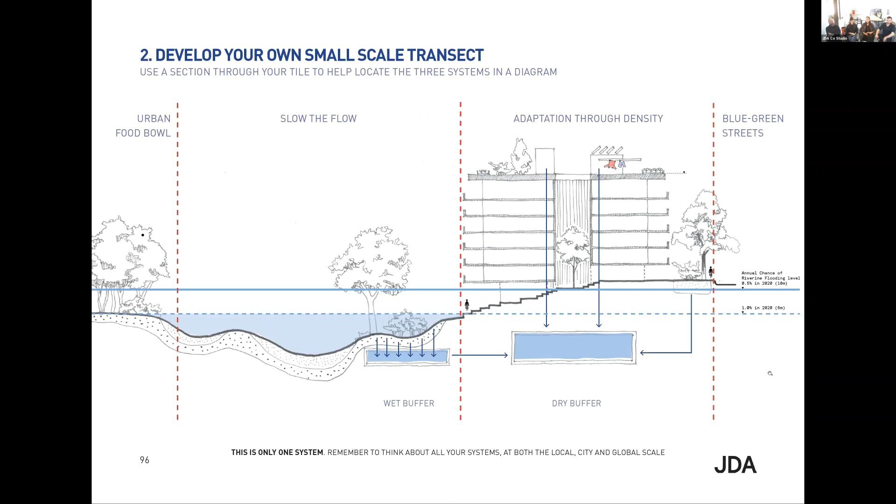Just now, what I'd love to occur at the end of all this is some imagery, whether that's a series of small images that explain your idea about how those three things connect—your interest from the semester, because we're hoping you've pretty much defined it by now. It'd be nice to use what you've done previously and overlay that on our context, and that will generate a pretty interesting discussion, I think. So: your interest, the densification, and the flooding.

Because we will use your work to help us advocate for a better kind of approach for Rosalie in the future, and we'll give you full credit. We'll give you options to get involved in all of that, because that's basically how we've worked and how we continue to work. So your work will become an important part of potentially changing the future of Rosalie.

And even if it's just to confuse, we're totally happy with that, because we like disruption—that's kind of where we sit in what we do a lot of the time. We focus on how we can disrupt a thought process, which is what they call BAU, business as usual. One of the ways we do that is through imagery and through visualization, so hopefully you can help us with that.

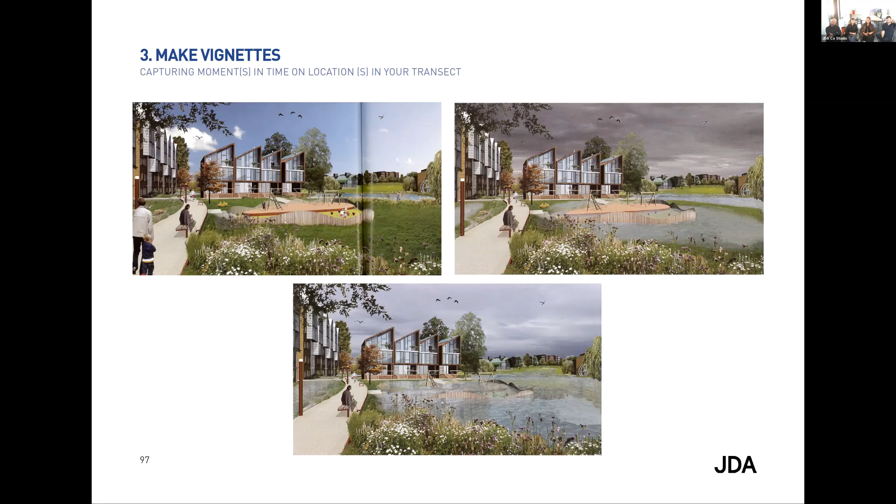Just some ideas of how you might plan your tile. It doesn't have to be finitely detailed. Obviously you've only got a week, or 5 days, or even less now, 4 days. The idea is that we're aware of that time frame. So to throw you into the design phase, the site information document has the analysis, and I've shared the Illustrator file so you can make a map like this very quickly. Don't be afraid to pick up pen and paper and develop by hand as well.

We prefer you to use Slack only. Don't email us directly or anything like that, mainly because that way, no matter who's in the office, we can check. Majority of the time it'll be Leonore, because Sam and Britt are both quite busy. Not that Leonore's not busy either, but she knows all about the Rhino model and all the other files that have gone into this.

Is that it? Okay, great, thank you guys. That was a great introduction to Brisbane and the brief.

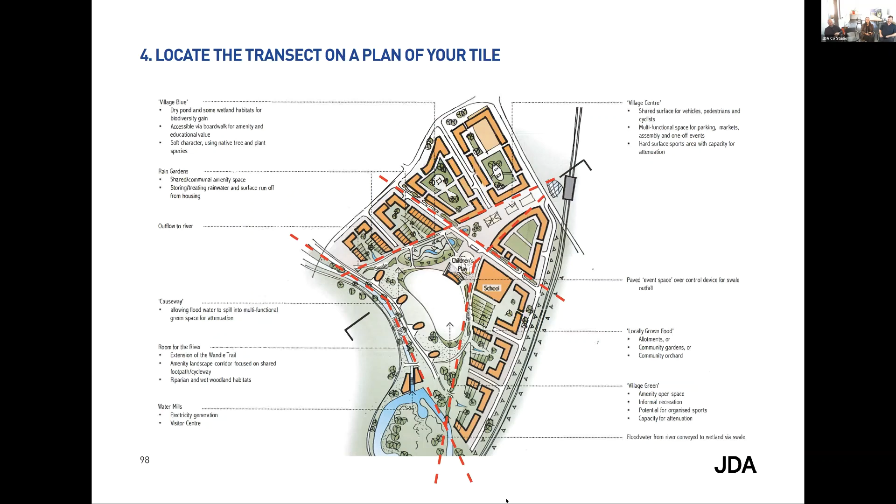Sam said we're definitely going to go over an hour, and I was like, no. I got sassed yesterday because I said I think we'll need more than an hour. Jake's like, wow. So, oh great. Okay, so we're all back here.

Awesome, so thank you for that. I just want to open it up to questions to the students. I do want to just make one statement as an opening.

So the three systems: the flooding, the densification, and the student system. Over the last couple of workshops, you guys have developed pretty coherent attitudes about urban systems, or coherent questions about how cities might perform. From the first week, we had the essential work that Rachel and Joe were working on, or tourism that Khalid and Jing were working on, or everyday adaptations from Rachel and Josiah. That's just one example, but we had a certain latitude to select other systems that might be important. So I'm just saying you're open to return to a concept that you encountered in an earlier session, but we want you to be able to build on that so that you're not starting from zero. You're already starting from something that you've dedicated a week or two fleshing out, some of the finer points, or even the broad brush strokes of. I hope that part makes sense.